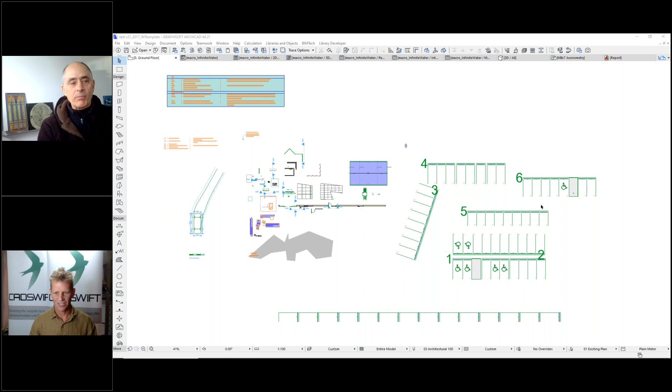So this is the biggest one you see here. This is the new parking matrix tool, where you can basically create your whole parking design with a single tool. So you can see these are numbered. I won't go into this tool too much. Can you just pull something to make a change and show what that's doing? Yeah, you can see there's lots of hotspots. So we can change parking bay types using little nodes here.

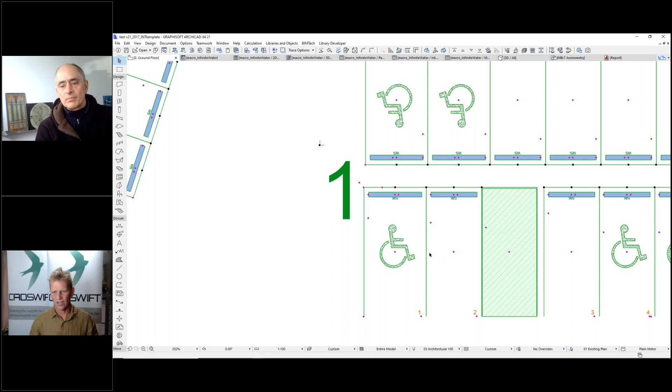So that's the disabled. We've got different types of parking bays, and what you can do is you define within the object the dimensions, the scope of the dimensions of that bay and how it works, and you can create your own bay types. So you can say, I want to create a motorcycle bay, and all motorcycle bays are this size, or I want to create disabled, parents with pram, car wash bays and all that sort of thing. There's also, you can put column spaces in between them, so you can turn on columns and create spaces between bays.

So without going into a full demonstration, can you just pull one of the main ones to get more units on there? Yep, so this is just this one. So you can just drag this out and put as many units as you want. You can also curve them. Let me just see.

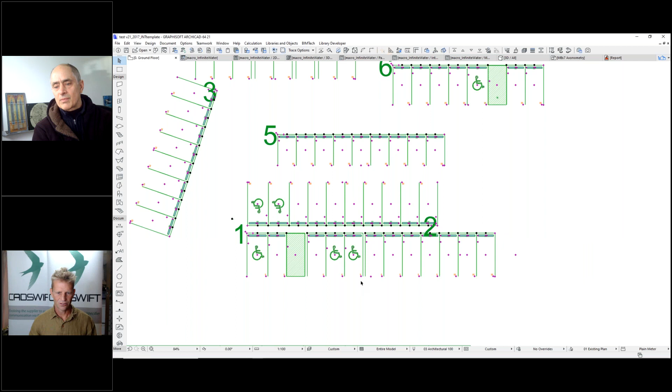Okay, so you can curve the bays. This is a single object, so each element is independent of the others, and they're numbered. You can insert more bays in between, so you can really control the logic of your parking design.

Now, does this show up in 3D as well? Yes, it does. Can you slope it in 3D? Yeah, there's slope, so you can see that one's actually sloping at the moment. You can slope it in both directions and all that sort of thing.

Is this part of a particular library? It's part of the Swift library, and I think it's part of the circulation library as well. So the Swift library is everything. You have a bunch of special purpose library collections, like circulation, which I'm sure has to do with parking as well as some sort of landscape elements.

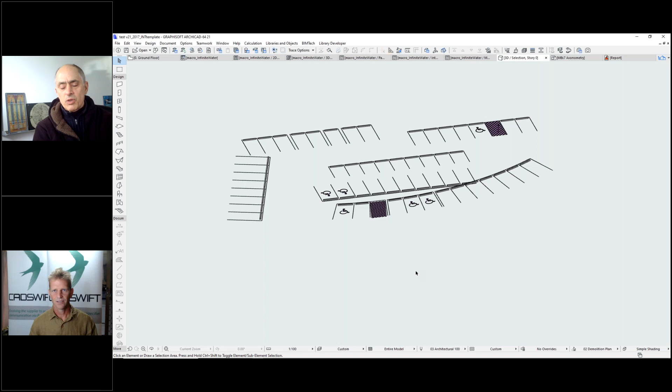Yeah, circulation is parking, there's a ladder object, there's a car ramp in there. There's also, this might be more specific to Australia, but there's turning circle calculations and vehicle sweep paths. So you charge a certain amount for each one of those. You can find information on the website, and then you have the Swift library, which is all of them.

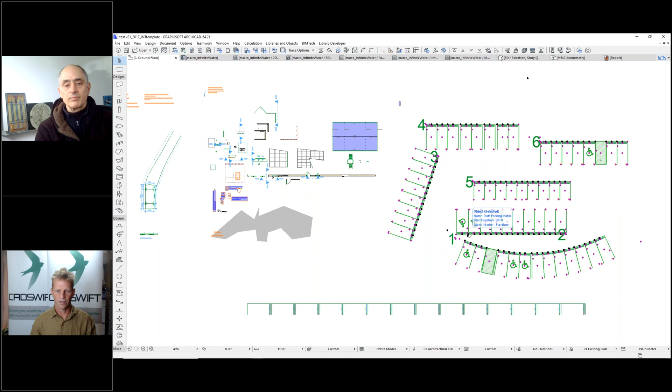Yeah, sure. Using this as a reference, all these elements are schedulable with all the different bits of data. One of the great things about the parking bay element is you can see if you're meeting project requirements, like how many disabled bays or total bays you have. I still have a background managing the CAD or BIM side of projects—I was still called a CAD manager when I stepped out, it wasn't called a BIM manager yet. So I know basically every piece of the process people need to get the most out of an object, and I try to fulfill all those elements.

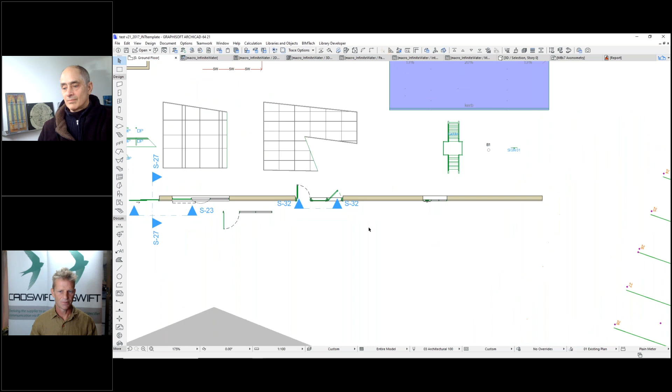So a couple others—that's the ladder tool. It started as a roof access ladder, and it's just morphed into all the different types of ladders. What sort of configuration—we don't want that, we won't worry about that. That ladder tool at the moment is probably in a very strange configuration, but you can have a look on the website at all the different configurations that element can do.

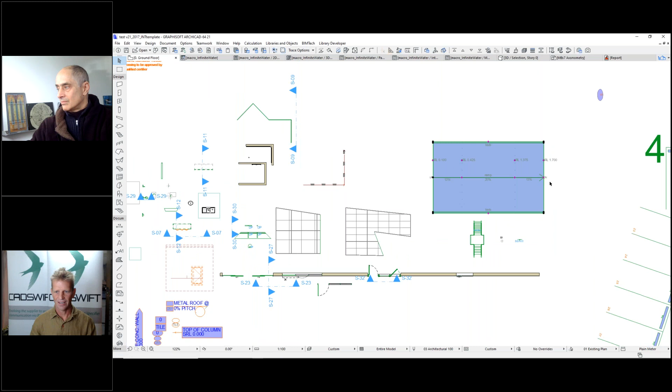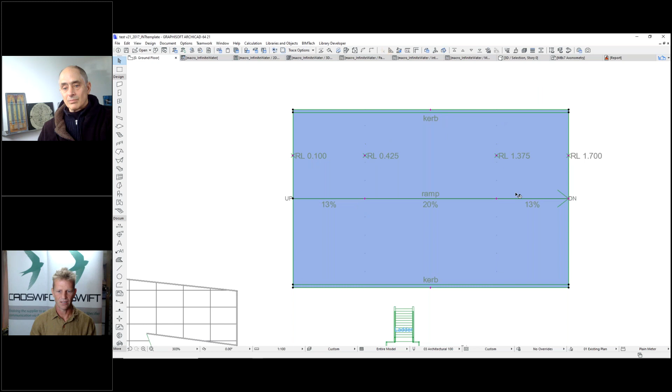This is our car ramp object, which can do all your different sorts of curving ramps. It can do a spiral, it can do just a U-shaped ramp and all that sort of stuff. It automates all your gradients too. All this text is automated and intelligent. Everything's intelligent, there's nothing dumb in this. It's sort of a mathematician's background - I like to do things as smart and automated as possible.

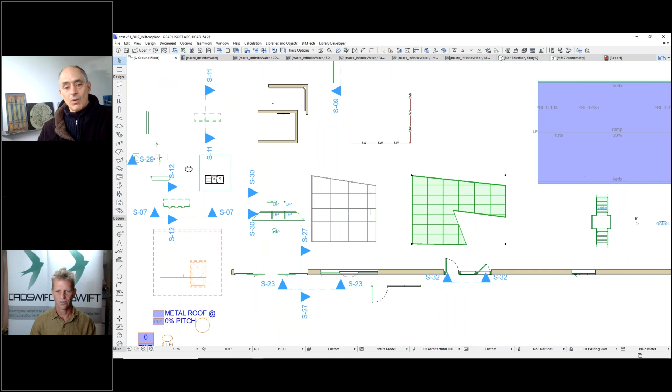These are the ceiling tools. There's two examples here - this is just the standalone, but this is the zone accessory one as well. So you can now place this really complex ceiling element that's got all your different edging and paneling and show it in 3D.

Maybe I need to use some different textures, but you can see the different levels here. So we've got everything, and you can turn off different aspects - you don't have to show all of these elements. But you've got everything from the panel to the edge treatments, your bulkheads, the frames that hold the panels, and the timber frame above that holds that. And I don't have the hangers turned on at the moment in this element, but you even have the little hangers that hang down from the frame element to the panels and all that sort of thing.

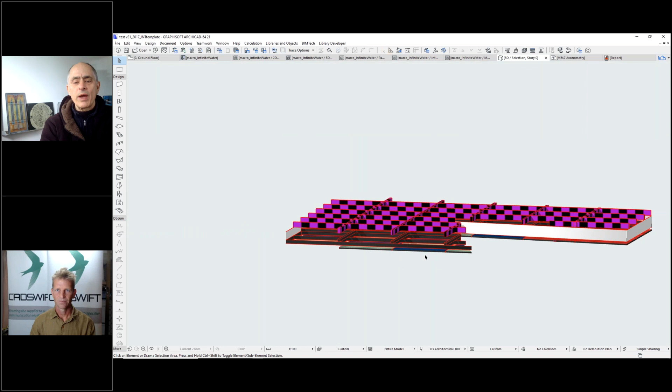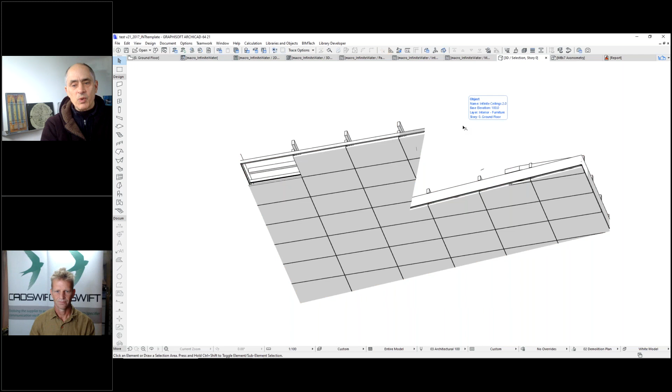So it's quite intelligent. Let's switch to a white view - under the view menu, switch it so we get rid of all those funky colors. View, 3D view options, and then just switch it to the white model near the bottom. Now that's just less distracting for anything where the textures are missing. It's actually just easier to see the geometry. Yeah, that was almost giving me a headache with all those different textures and things.

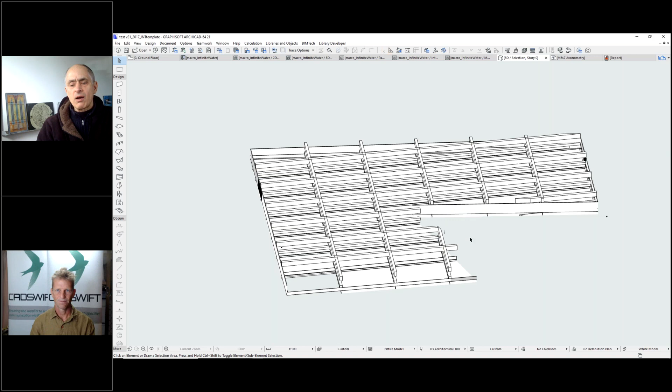So yeah, it's a fairly intelligent and complex tool, and obviously you can turn off individual sections. Let's just open up the dialog so we see the basic way it's approached. Sure. So here you have where you just set the panel arrangement, you know, equals, different joints, spacing, and all that sort of thing. I should probably expand the size of that element.

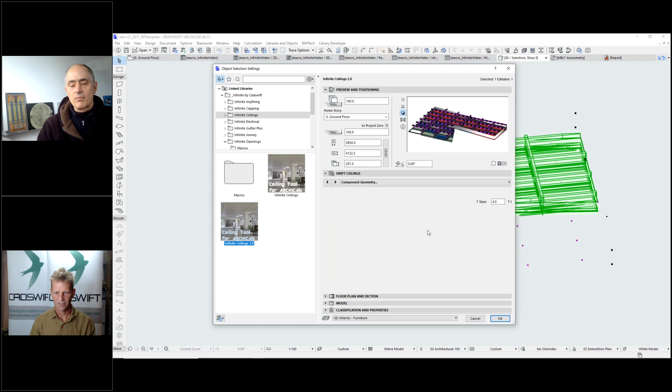And then you basically go through this menu and control each of these different elements independently. So this is just a graphic. You go to your frame settings up here, hanger settings, main channel, spring tee - so you've got different profiles and all that, cornice and bulkhead, and then the panel settings as well, and even the panel gap. And then the boundary is set either manually with those hotspots, which you can have as many polygon elements as you want.

And then you also said it can pick up a zone. So if you actually put zones in a room, it'll pick that up. That's right. So this is, you have the ceiling tool, the original ceiling tool.

This tool - I'm not sure how many of you online were part of this process - but this was something that was actually crowdfunded by ArchiCAD experts around the world. I think it was originally requested by a couple of guys in England, like the Bond Bryan guys, Rob Jackson, and a couple others. And then yeah, everyone got together, and a lot of the people from Sweden as well, and Link Architecture - that's where this image comes from, this is one of their projects. They got together and funded this tool, and so they all use this quite successfully at the moment.

So yeah, the zone thing was like - zone accessory tools are fairly easy to script from a GDL code's perspective, and so after a couple of years working on other tools, I quickly got onto that because placing elements, manipulating elements is the hard part, is the tedious process. So when you can just sort of magic wand a zone and it's there instantaneously, and then you've just got to go into the interface and set up your design, it's really quite fast.

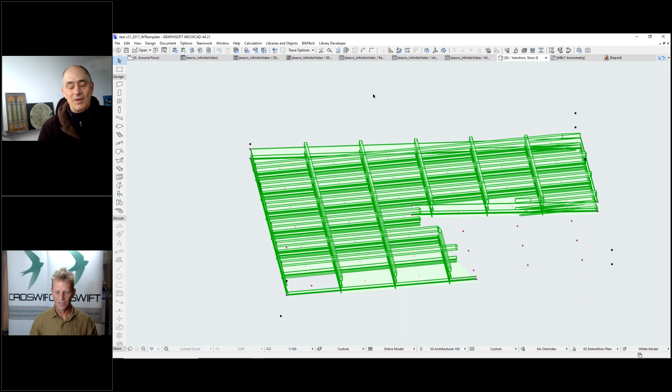The process was arduous and expensive. So I wanted to find a way, and I think it was 2014, I discovered that ArchiCAD objects can actually talk to external XML files. I had to do a project - a plumbing project for a piping company in the UK, Blucher I think that's what they're called - and they sent me this database of thousands of components. I'm like, if I try and do this the normal way, this is going to take me years.

So I started exploring this communication with external databases. They had a very detailed database of all the different sizes of all the different aspects of their components. I thought, if I could create something that could just read this, I can get this project done in a month or so. And I did, and that's how it worked - I was using text files then.

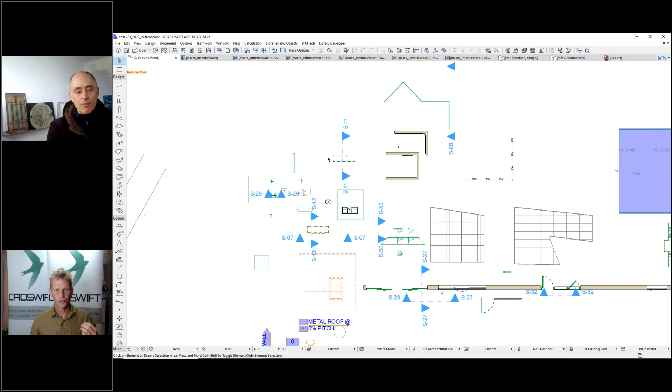I started building generic objects that could assume any geometry, and that geometry would be controlled via this external data. So what that's resulted in - I will go to the plumbing object to show you.

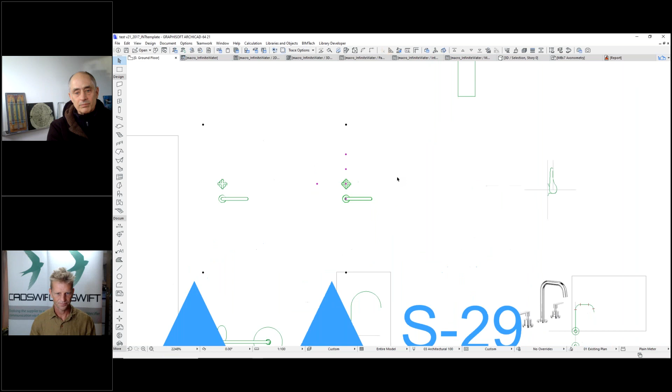Might just, in case I make a mess of things - I might just make a copy of this in case I edit it too far and want to go back to the start.

This is the new interface I'm working on, not quite complete at the moment. I've completed this aspect, which is the spout aspect of the plumbing element. But if we go back to the original - so I'm a back-end developer, not a front-end developer, and it's been made very clear to me over almost a decade that my interfaces are not really intuitive. I build a lot of capabilities in the back end and just open it up to everyone to get access to those parameters, and it can be a little overwhelming.

So I've been trying different interfaces and working on different things. If we go back to the start of this element - this is one of the interfaces I tried before. So what you have here is access to the types.

So you set bench, wall, and so on. And then you set, this is actually the configuration of the tap. Is it single? Do you have two? Is it vertical? Is it a side mixer or a top mixer? And then you get access to a catalog of elements.

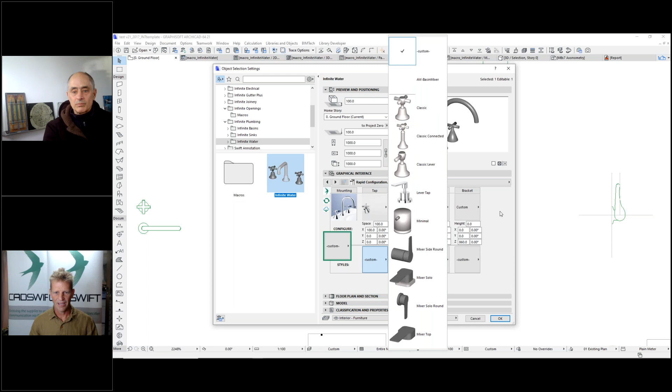Now, the nice thing about this is that you can control this. So if I show you a different view, this is just sort of an easy way to access the catalog quickly. If you go into the next page, this is more where the configurator works, where they can configure it. So here's your taps, positioning, and all that sort of thing.

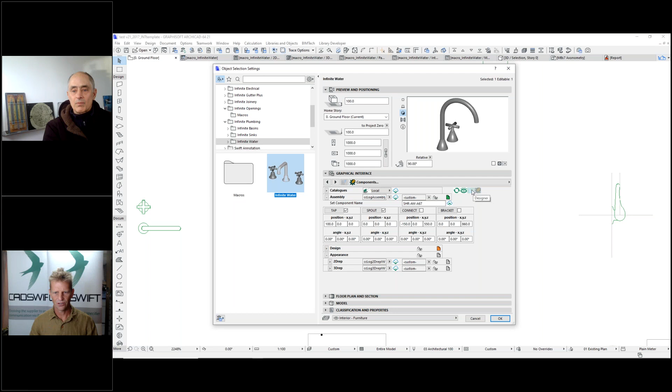of those taps. And then we go to what we called the designer menu, and this is where you get basically just access to the catalogs. So these are catalogs of pre-configured elements within this project. So if I can just jump to this element.

Let me do a refresh to get that data all working properly. I've probably got some things working on, but because I've been messing around with this tool quite a lot. Do you have the catalog option working? Because it looked like you'd be able to choose something from a catalog.

Yeah, this is the catalog. So this is the catalog. This is the built-in catalog that you can actually edit yourself. Select a different catalog, overall thing rather than individual components. So these are the two catalogs we have in here at the moment. They're built in to the tool.

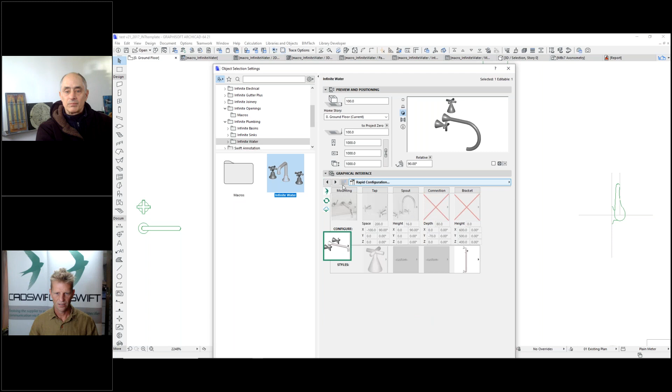But each component also has its own catalog. So this is the tap aspect, and the catalog within there. So there's only a few elements in there. You've got the spout catalog down here. So we have access to, I think what I need to do now is I just need to go back and download the latest catalogs. Let's open this up so we can see.

So we have download. So these are your little download buttons for catalog elements. Okay, so these catalogs are going to, the intention is to have manufacturers contract with you to create versions of their elements that can then be described with different options. Hey, you have it with this tap or that tap, but it's the same family of faucets or something like that. And so there's some programming that goes in to create the model, and then there's programming that goes into do the controls.

So right now you have how many manufacturers in this tap object? We don't have manufacturers. We haven't even contacted manufacturers about this aspect yet. Kind of, we're at this point where it's the chicken before the egg sort of story. We need to have this cloud system built for the whole system to work perfectly.

The only manufacturers we have on board at the moment are for the window and door tool, and we have ASSA ABLOY in there at the moment, and we've got another Australian manufacturer who's just come on board with that as well. And that's an interesting story because that Australian manufacturer is actually an architect firm, an ArchiCAD using firm,

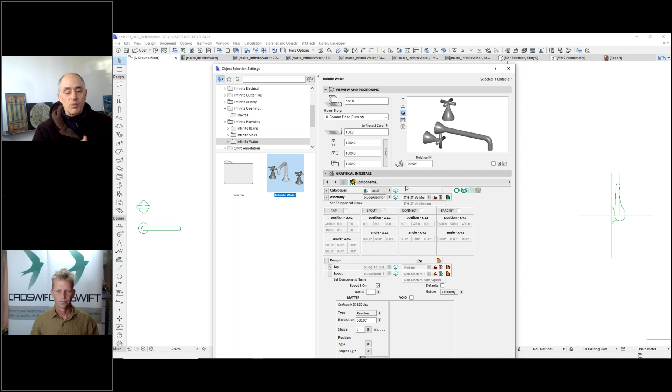So let's talk about the advantages of this approach from the user perspective as well as the manufacturer perspective. From the user perspective, it's clear that there's a lot of flexibility here, and you aren't limited to just, you know, in the standard ArchiCAD library, whatever they have, how many different taps, you know, they have 10, 20, whatever number of taps. You have, well, essentially could be an infinite number. Now, you mentioned the thing of having generic components that are set up as part of an initial design and then ultimately swapping them out for manufacturer specific purchase criteria, right?

So the idea here is that you can create something that the client will go, yeah, that looks pretty good. But as an architect, you're saying, well, we'll find something that's close to that, that looks like that or functions like that. And we'll swap those in and get pricing on that. Or the contractor will specify, hey, let's get this particular supplier. And you want it to be able to swap very easily without having any big issue.

Now, for a small residential context, like you have 2 bathrooms or whatever, no big deal. But when you're doing multi-family, office, hospital, or other larger things, this can be a much bigger question. Or even just in an office doing lots of different projects quickly. So I can see the benefits of doing that.

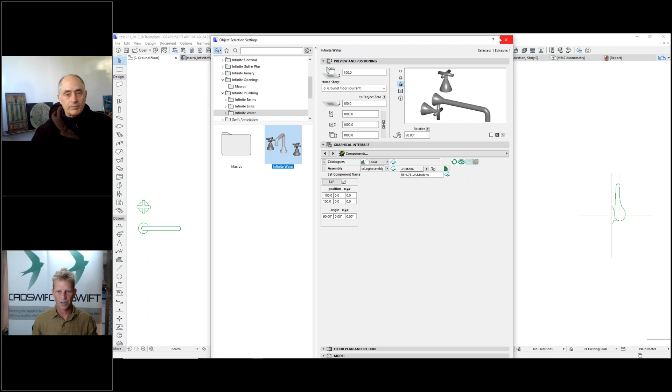Let me just... it seems that in the middle of my coding, I'm not quite finished with something. So some of the arrays are not calculating here. That's because I'm still in the middle of coding this element, manipulating it. So I'm just going to cancel that.

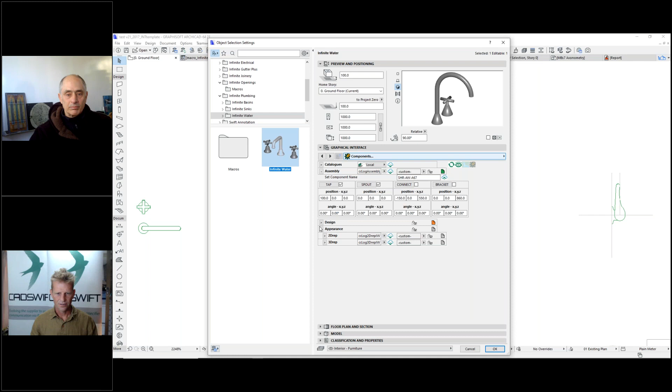I'll go back into it now, and I'll just show you very briefly. Let me turn this function off here. So if we go down to the design, this is the organization. There should be numbers here of how many taps you want to turn on as well. Part of my coding is sort of broken a little bit here, so it's something I can fix very quickly, but I won't do it now, obviously.

So if we have a look at the tap element, I'll go to the page for that so we can see just that. You have 2 aspects. There's 4 separate pieces of tap geometry that you can create. I have to put a limit somewhere. But you can have multiple versions of these pieces.

So basically you're working with base geometry. You're nominating here the matter and the void, so solid geometry and a way to cut that geometry with a void of some sort. I'll turn that void on as well, but it's basically the same sort of thing. So you're nominating whether you're using an extrude, a revolve, or a tube. These are the three main pieces of geometry that people won't have too much problem working with.

We could go into all sorts of different prism types, but you really need to understand GDL to use those things. So can you just show a simple manipulation?

It's one thing to say, hey, you have all these controls, pick one of them, make a change, let's see what it does. Okay, sure. Let's go to... so this is a revolve at the moment for the tap. I think I've got that one worked out.

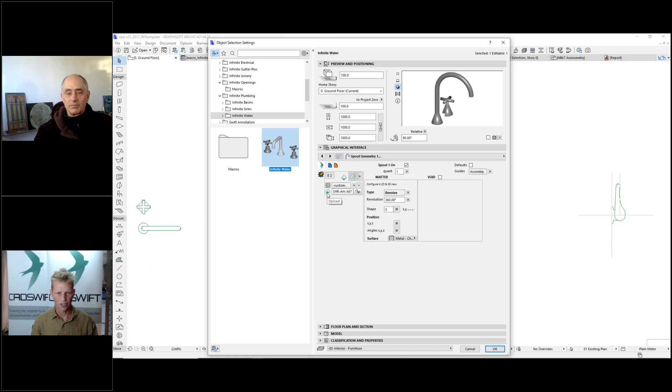Okay, so this is a little quick panel to the catalog as well, different elements from the catalog. We'll pick another element on the catalog just so we can see how it swaps. Okay, let me just make sure I've got the right catalog in here. So this is the download button to update the catalog, and that's an upload button, so you can obviously upload your own modifications to the catalog.

Okay, so if I click the classic basin, you see that's a different profile there, different shape. Let's go down to lever spout, so there's another one there.

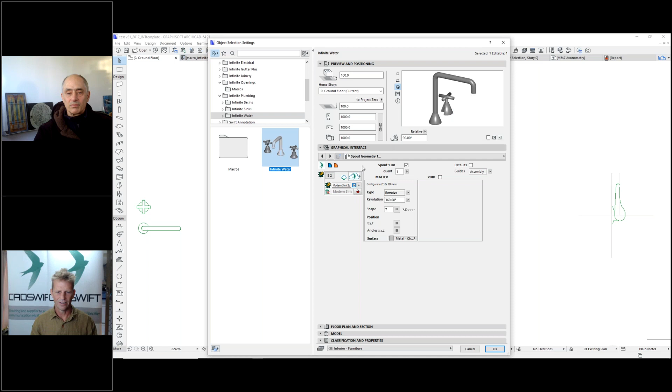Modern sink, and in those other pieces of the interface, you have access to all these through nice graphical images, so you don't have to work on the names here, you can go to the nice graphical images. But if I wanted to modify something like that, I'll do that now. We'll unlock that because let's say this is the base of what we want, but we want to square off this profile, and maybe extend or shrink the tap a little bit.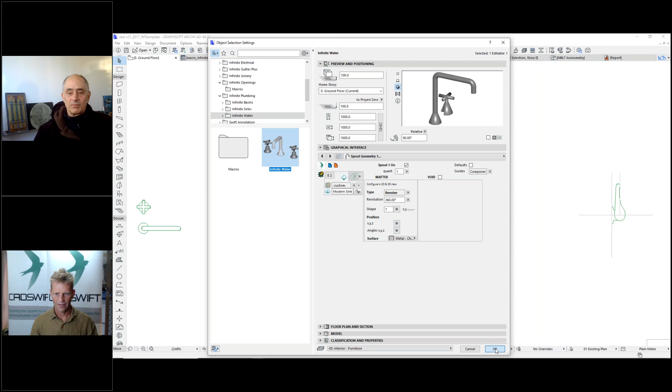If I unlock that, then I change my guides to component guides so I can see them in 2D. There's a little bit of a positioning thing here, I'll just show you how that looks at the moment. Must have the 2D representation, get rid of that 3D projection. Let's go back to the spout.

Click OK. So these are all the little nodes that you use to change the shape. That's the spout path there, and this is the tap next to it. Let's stop for a second - you made one switch I want to explain. You had been showing a top-down view as the symbol, which is convenient. Here now we're showing control points that relate to radiuses and lengths of things, and you're doing it in a 2D view where you can literally pull these things and adjust them.

So this is a setting where you said, let's switch out of realistic mode and go to drafting mode where we're able to manipulate. And if you were to manipulate, can you make that shorter? Just show us how you would make the extension from the tap to the end where the water comes out shorter - can you do that? Yeah, sure.

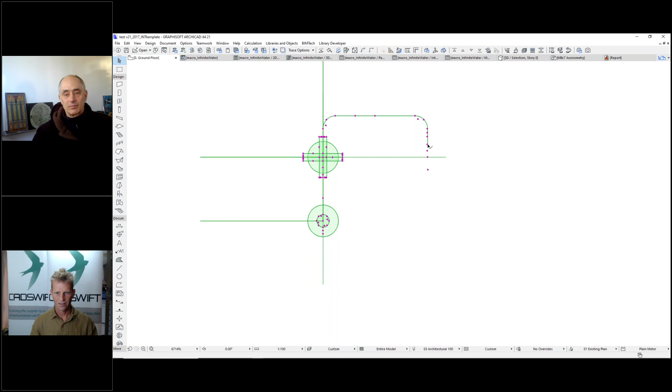So these are the nodes here. Let's say you want to adjust this one and bring that up to there. Now if we have a look at this in 3D, you can see we've now got a much shorter element. That tap's got that void cutting out of it - that's why it's showing up like that.

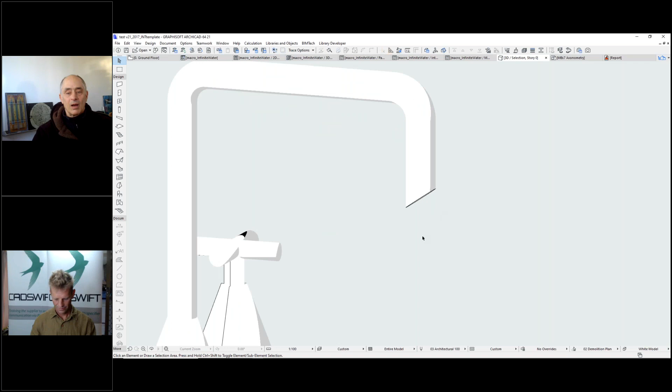And to demonstrate again, if we want it to be longer - longer. We're not going to go past this point because this point controls the final face. I'll show that - let me bring this point out over here and you'll see it gives us an angle on that. So now it's longer and it's got that little angle because that last point of ours is somewhere out here. So you're controlling the direction of that actual final face as well.

So you have numeric controls of things, but you can, in many cases, just go and drag things to visually change them. Very cool.

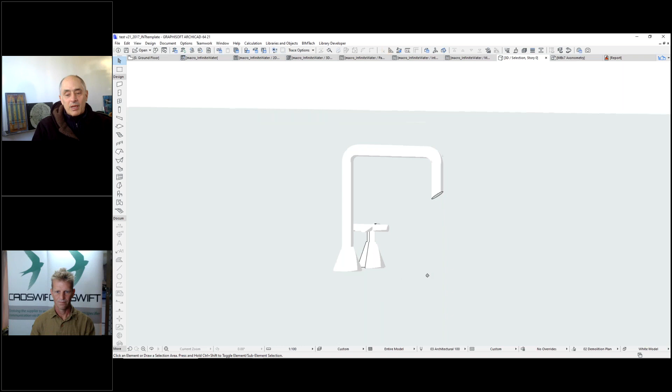All right, so this is obviously a work in progress, and as you mentioned, you're continuing to program it, put in more functionality, and try to simplify the interface, or at least make the interface as usable as possible.

I'm seeing some comments here I wanted to pass along. Craig Vaughn says this is genius, lots of potential. Nicole Kucera has - I don't know if that's maybe Ditto or something like that. And Andy Bunbury asks, who is the Australian company?

That's where I am. So I think this might have been when you were saying this was for - you were doing some work for a company that isn't that large, that bought the timber framing facility. Yeah, unfortunately I'm still confidential in that regard, sorry. They'll be sending something out soon though. We're getting to a stage where we're completing a lot of their content, and they will start sending those elements out. But they're an ArchiCAD firm who are now producing their own windows and doors in their own factory, and coordinating that whole process start to finish.

And this is something that you spoke about, which I didn't get to - the benefits as well for the manufacturer in the process. This is what they're looking at - the data, because it's XML, machine readable, most applications can read XML data. We can actually use the data that controls your content in ArchiCAD, goes straight to the manufacturer, and can be plugged in straight into their APIs as well.

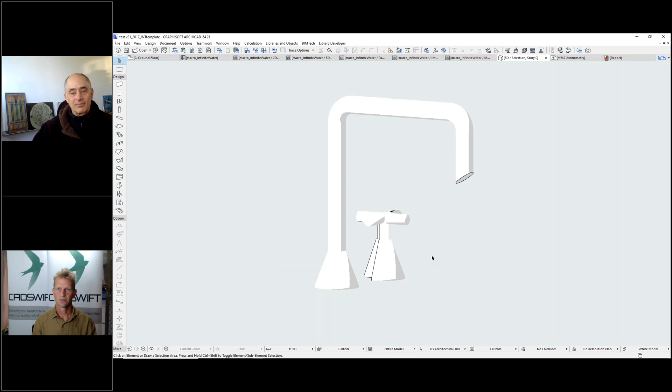I have a question from Steve Nickel saying for us, we don't need specific manufacturers so much as more options available in ArchiCAD — for example, are you doing door hardware too? I know you have your infinite openings tool for doors and windows, which can configure interesting shapes and ganging of different units. I'm assuming you have different hardware for the doors as part of that.

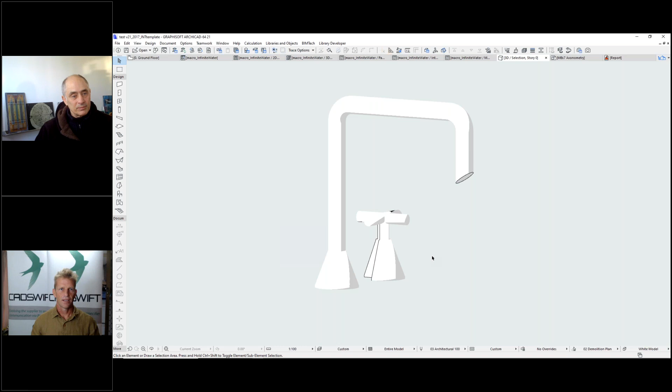That's something we haven't quite completed, the hardware aspect. We do have the tools ready to go; it's just a matter of time pulling that macro in. The fundamentals controlling the geometry of this element are exactly the same as our infinite electrical tool, and the same as the tool that started this whole configuration of elements, which we call infinite anything. I like to be a little humorous with my names — for mathematicians, humor is probably not very funny to other people.

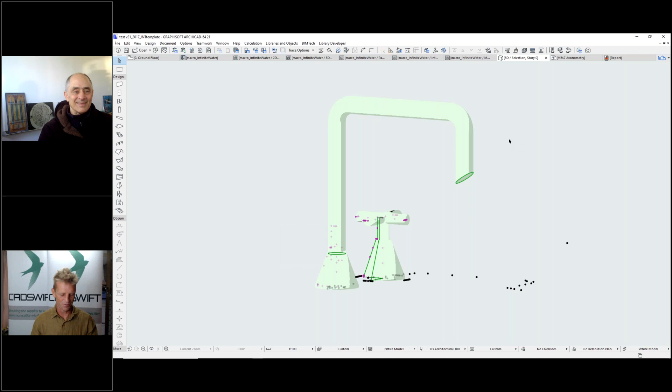But we do have a tool called infinite anything. I just like the combination of the word infinite and anything. This is something I was playing around with - this is a handle here actually, so I'll show you in 3D what I've been playing with. This is infinite anything, and it's just a matter of manipulating all these extrusions and revolves to create the shapes. Obviously, like the plumbing tool you saw, there's multiple pieces of geometry you can add with multiple different shape types, so it's fairly extensive.

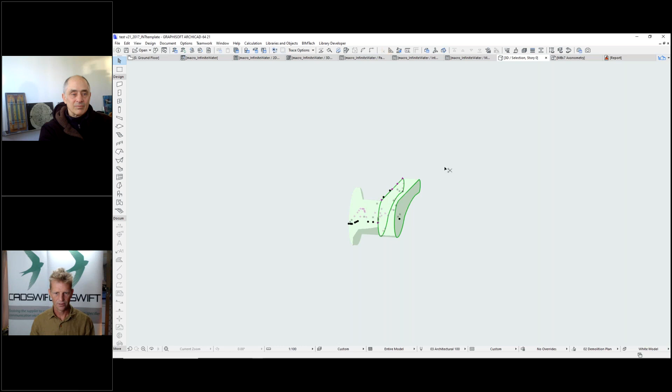The plan is basically to pull this infinite anything macro into infinite openings to control all your geometry there, so you could effectively open up this tool. This was the original one, so this is probably the most primitive looking of them all.

Let's go into our catalog - see, I haven't even saved pretty images for these catalogs yet. Got it on the designer menu. Okay, so these are just elements, element 1 to 8. So you've got 8 different elements, and each element can have multiple pieces of geometry.

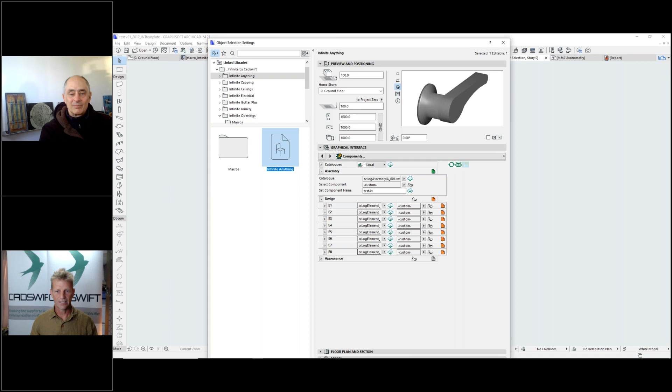You could effectively come into infinite anything, create your hardware, your door hardware, save that to the catalog, then go into infinite openings, open it up, go to the handle, the hardware aspect of infinite openings, and that component you saved here will then exist in infinite openings. So you can apply it to that tool, or it will also exist within infinite joinery, so you could apply it to your cupboards if you're doing joinery hardware as well as glazing hardware.

So for things like door hardware, I can imagine someone, could be you, could go into 20 different door manufacturers from around the world and pick out a few dozen different common variations, create them so that an ArchiCAD user could say, yeah, that looks pretty much like what I want. And then they get that, and of course they can make it a little longer, a little thicker, a little this or that.

Yes. What people do not want, Kristian, is to start from blank and pull a whole bunch of node points to create it, because you could create morphs. If you're going to do that, you might as well just use morphs, right? It's far more efficient to use morphs.

Doing this from scratch - if I was to show you one of the shower elements I did, that is a shower on a rail with the hose element, and then it's got a rain head over the top as well - I think that took me close to 2 hours to configure, and it actually kind of did my head in because I kept getting confused as to where I was. So the intention is not so much that you can manually create anything you want, it's more that it can be anything you want it to be, and we will put in processes to make that as efficient as possible.

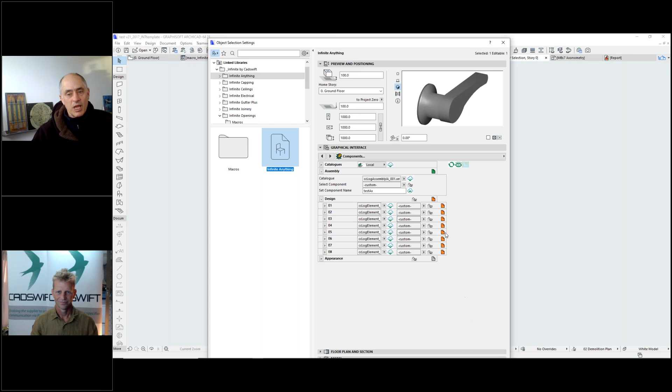When you're a developer, you can specify in some scripting, in GDL scripting, it says, hey, in the interface area of this part, which is separate from where you're creating the geometry, the 3D and 2D geometry, in the interface, which is the dialog box, what does this look like? So here's the interface script.

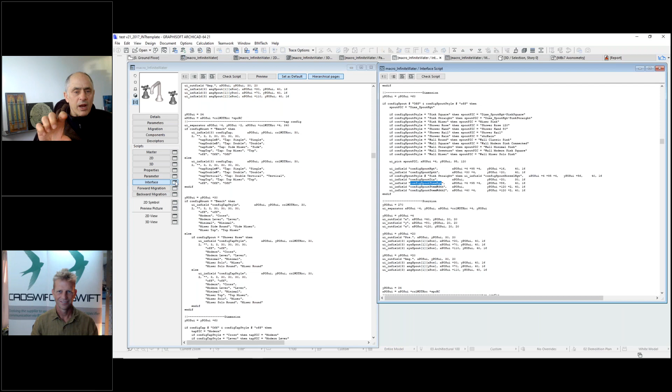Yeah, so this is the interface script. Let me just go into one area and say this is defining a pull down menu or something like that. Okay, let's have a look and try to work this out. This is actually probably a pretty good one. This was the latest, the new interface I'm working on here.

So basically what you have, this is the infield, so this is your parameter. That's the mounting configuration. This is the spout configuration here. So these elements, if I then go to the preview, let's go to our presets. So that's that. When I said the mounting configuration, that's this button here.

So it's a UI infield, a user interface infield, and the user interface infield has several different styles to it. This is UI infield, and I think it's a type 2, which gives us a button, an image, and a piece of text. And then these are standard infields, which is just a very basic element.

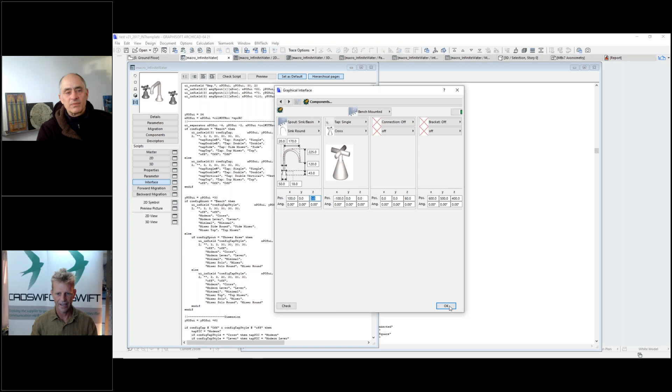So the term you're using is infield? Yeah, infield. I guess there's infield and outfield. Short for input field. So you have your infield, and where's an outfield? I don't use many outfields these days because they're all just text.

I think this is probably going deeper than we need to. Let me just summarize. Basically, in order to get these things looking visual, like Kristian does routinely, there's some scripting that uses built-in options within ArchiCAD's environment that says, in this area of the screen, please add this type of thing. It's a drop-down menu, or an input dialog box where you can type in a number. There are different things, and you're defining the size of it. And if it's pictures, there's a separate place where you say, use this picture, and give it a text name that refers to a picture loaded into your library of interface elements.

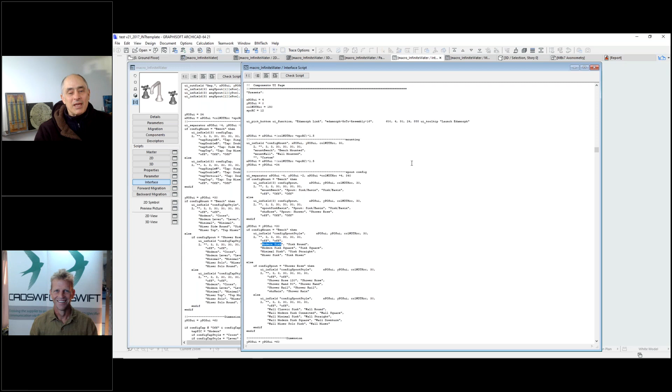So that's how it creates the user interface where you go, oh, I can select this by clicking my mouse. So it's not visual, it's not a visual builder. You script something, look at it, and say, that looks good, or I need to make it taller, or I need to move it around because it's on top of something else, right? That's right, nothing in GDL is a visual builder.

In fact, the biggest complaint about GDL is the manipulation, the interface to manipulating GDL is quite primitive. And I understand that because I know other coding languages that it's a lot more pleasant to work with. But as unpleasant as it may be, as primitive as it may be, it's still extremely powerful.

Yeah, interfaces, you're limited with interfaces a little bit. It's very rectilinear sort of thing. You can't do nice little curvy lines and stuff like that in an interface, unless you save an image of a curvy line. But it gives you all the buttons and functions and links and parameters that you need to operate.

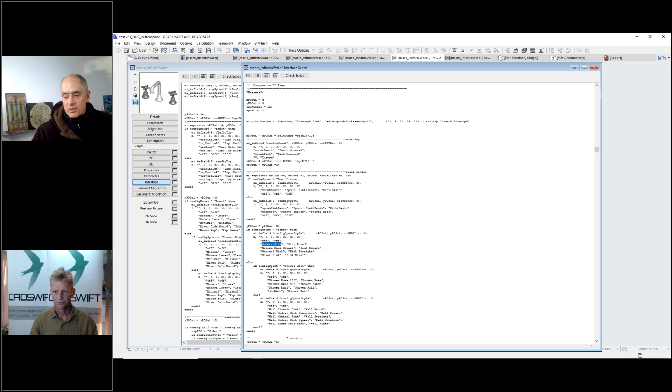So let's go back to some visual things, but Ted says thank you, so we answered his question. Let's see, I'm just looking at comments from Steve. Yes, based on maybe half a dozen manufacturers' products.

I've got this right, so I'm just going to give you the feedback, Kristian, that you're focused certainly on creating a versatile, sophisticated tool in all of these areas that gives a wide range of functionality, that allows communication through both automated things like the XML files, as well as graphical interface where you pull something, select, type in a number, and it does things. So you're creating this amazing resource.

In order to make it usable for ArchiCAD users, or more usable, what you'll need to do is at certain points say, I'm going to stop programming this darn thing. I'm going to create content for it, or get somebody else on your team, or as an outsourced resource, to go and do research on manufacturers and create a bunch of sink taps, create a bunch of doorknobs, create a bunch of this, create a bunch of that.

Now, I'm sure you've done that to some extent, but if you put in more effort on that, then people would go, wow, I got to have that tool because I can choose from 50, 100, or 200 sink taps, and some of them are pretty close to what I want. And so the XML, all that interchange, I mean, that's fantastic.

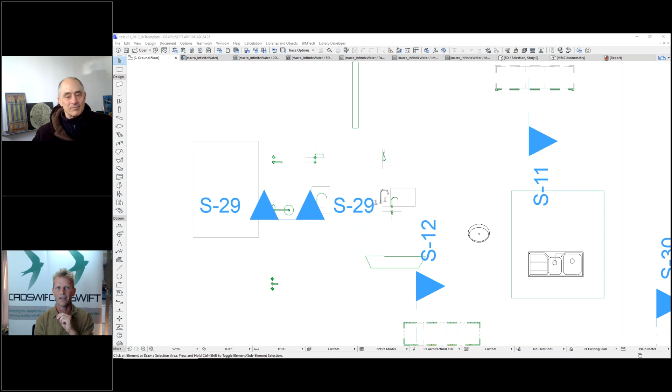It's the mind of a back-end developer, I think people are interested in seeing this sort of stuff, seeing what's about to happen, and understanding the integrity of the back end. These things, we can do anything. We can do any geometry you want, any data that you want, and we can have this happen really quickly. We're working on making it very easy for you to use as well. That's the idea, that we have all our ducks in a row for when we launch the cloud. The interfaces will be polished, intuitive, and the catalogs will be extensive that you can access as well.

Okay, so I have a few questions I want to pass along to you. Peter Wilson says, do these GDL objects require a lot of memory usage when included in a project? No, it's quite amazing actually.

We've actually reached all the limits of GDL's capabilities as far as storing data, memory, and things like that. GDL has a limit of 1,024 parameters. We discovered that because, obviously Graphisoft knows that, the GDL coders at Graphisoft know that, but we discovered it because we reached that limit. The array data for a parameter, multiple values, has a limit of, I think it's 32,627 values. Pretty sure that's the number, and I'm good with numbers, so you can probably quote me on that.

We reached that several years ago, so we worked all that out. I had to contact Graphisoft and say, what's going on? It's crashing now, it stopped working. They said, you've hit the limit. That's a limit that's actually put in place by Graphisoft, not a limit of the software. Well, it is a limit of the software, but it's a limit they've chosen because they thought it'd be ridiculous that people would want to go beyond that for starters. They think I'm a little ridiculous, but they love the work I'm doing, and they've set those limits in to keep everything working smoothly and safely.

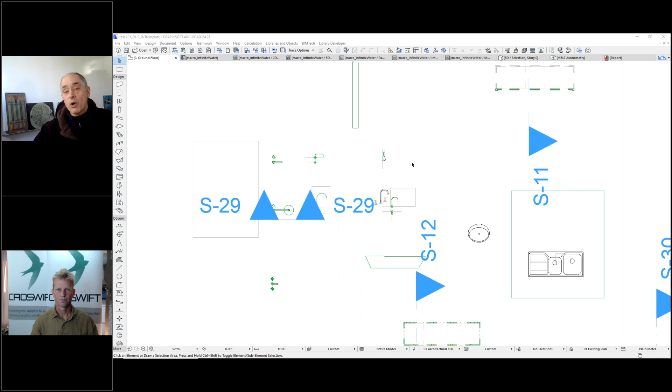So what Kristian is creating shouldn't tax it at all. It should be that only when you go into the dialog will you have all of these controls. The rest of the time, it's already figured out the 2D shape you need to see, which doesn't have to be complex - just enough to diagrammatically represent things, and the 3D geometry similarly. So maybe that was longer than it needed to be, but in practice it shouldn't slow down anything, and there are measures in place as well.

So we want this to have a polished look so you can do a nice render, but we also want it to be efficient in the project. GDL is amazing. If you want to talk simple - I won't go into this because I know I'll probably start to ramble on, I get excited about the more detailed technical side of things - so I'll try and control myself.

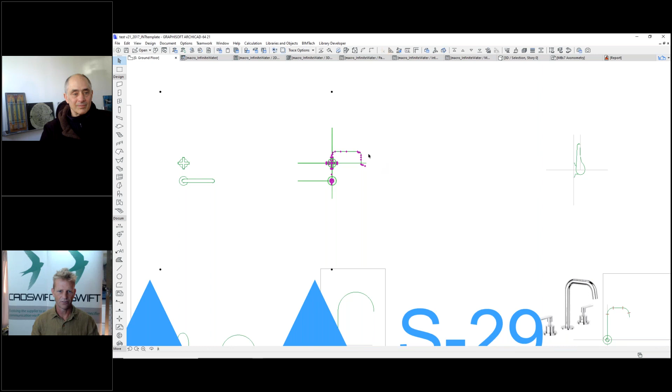But if I create a bath object in Revit, which I don't do anymore - I used to have to do Revit content because everyone kept asking for it, but now I can't stand that piece of software - if I was to create this tap object in Revit, you're going to end up with a file that's somewhere around 600 to 700 megabytes. This library, which can do any tap you want, is around 240 megabytes, and that's big for ArchiCAD - not big as in hard to compute - but if I was to do just a one-off piece, you're talking about a 12 to 15 megabyte file.

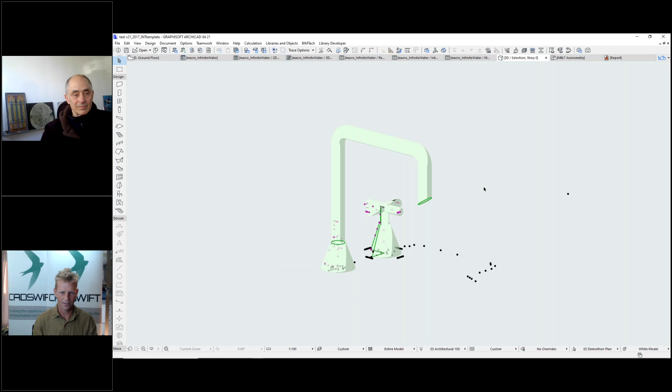The efficiency of GDL is astounding. I really don't know how they've achieved it, but they've done an amazing job.

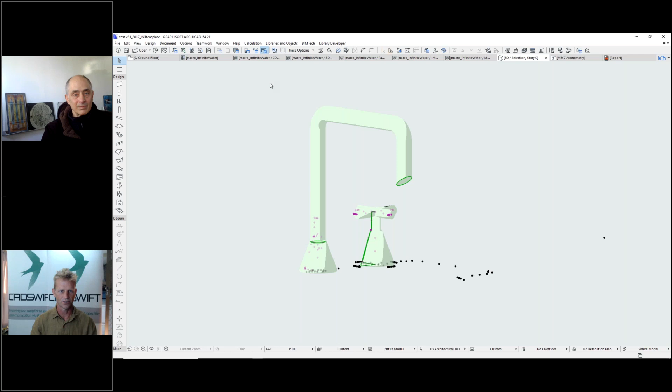On the other side of things, as far as polygon count - you can see this is a really nice, fine profile here, but we can dumb that down for when you do elevation views, and that's tied into the model view options. So you can set up your model view options - I'll just go into this level of detail. What are we looking at here? We're looking at plumbing. You can go into your model view options and control the level of detail of this component, and it's automated because it's model view options.

You can say, okay, in my model view options for my renders, I want a resolution of 360 - that's lines per angle, sort of thing. But when I go down to my elevations, I just want a resolution of 12, or even you could go to 4, because something that is round and needs to be round in a render can be a flat, rectangular element in an elevation. So I'm pretty sure I've got this set up ready - I'll just test that for you.

I always hate doing these live tests when I haven't done them before because you never know. Oh, there we go. So you can see we're changing the geometry of that thing so that when you look at that in elevation, well, these lines are ugly, so you might need to work on that. But when you look at when your elevation does a projection of that element, it's projecting a very minimal amount of geometry. Put it down to 12, or switch it to 12, and it might probably be enough to get... well, sorry, I don't keep getting where I'm at.

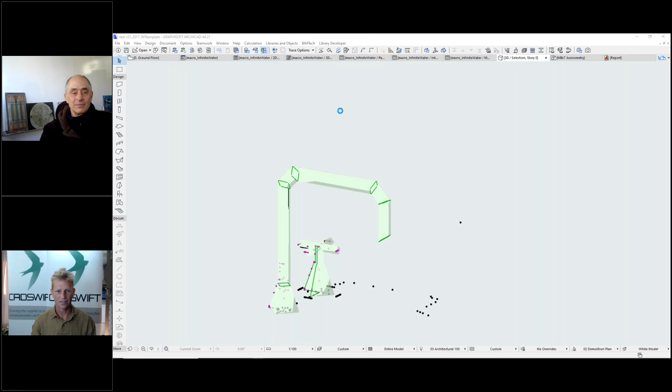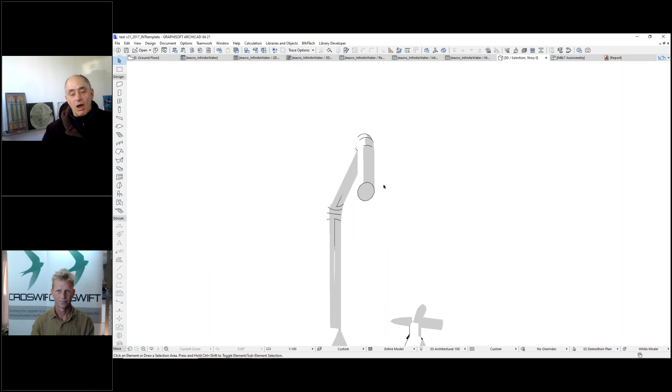12 is actually a standard that we used to use, so when I used to lock these elements... sorry, 12. So this is just an example of how configurable it is. And what Kristian just did was made a change globally that's temporary, obviously, because it's switching on the fly. But this would be, if you had 500 of these taps, they all would adjust. All the plumbing fixtures which are under that rubric would adjust.

So we have some other questions here. Paul Adams says, does your door hardware include door closers, deadbolts, kick plates, push plate, pull levers, etc.?

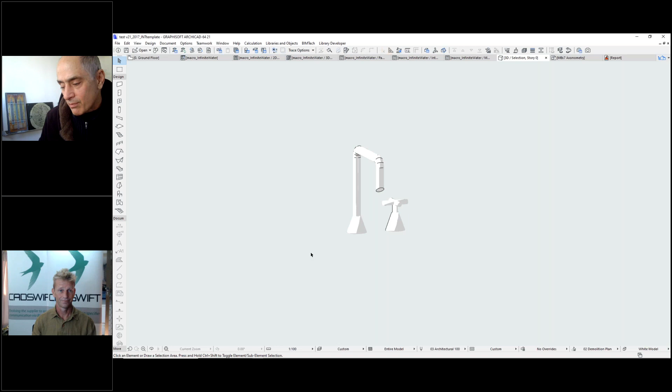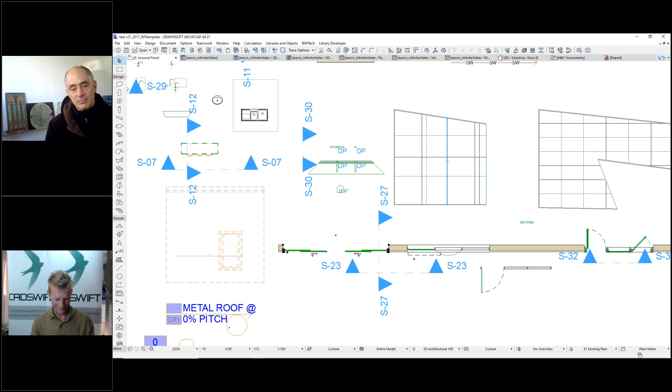Yeah, sure, that's a really good question. Actually, a lot of these elements were done when we started creating the ASSA ABLOY content. So if you go into a door object... I'm messing around with these things so much, they're all a little too complex, but let me take this one because this one looks a little more simple. You can see we've got curved glass and that. So let me just activate that license.

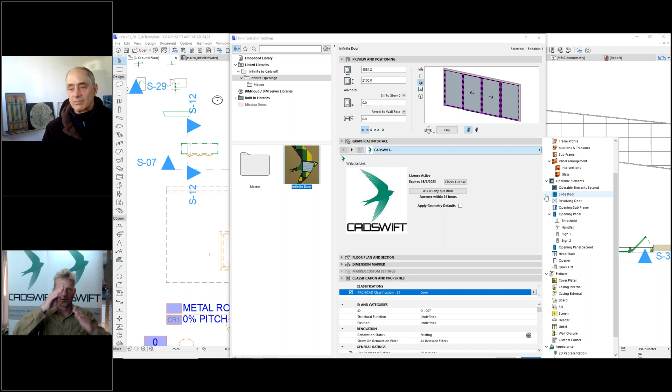I won't go and change that because the 3D doesn't really matter too much. We were looking at the elements. So these are the components of the door. We've got a design, we've got a shape, we've got the frame profile, we've got mullions and transoms - they're also different profiles. We have a subframe, so that's the frame that goes around it. These are the panel arrangement and intersections, which you can turn on and off, so you can do a real crazy sort of geometry within that.

I won't show obviously this whole tool, but you could basically have your mullions and transoms, you can remove sections of them. You can also skew them so they're all off on different angles, and then remove sections. The ones that he was mentioning, like kick plate or door closing... yeah, so if we go into the opening panel.

So in the opening panel, we have panel, handles, kick plates, there's a viewing panel, and there's a grill as well. Let's go to kick plates and see what you have built in. Kick plates are very simple - you've just got an internal and external kick plate. This is all locked down.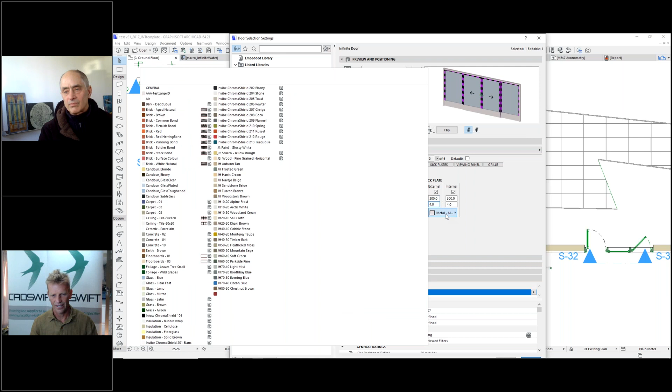Let me just quickly go back here and customize this. Internal and external kick plates, and you nominate the height and the thickness and the material of that element. What about dead bolts? We don't have to show all of this, but since he listed a few things, just going specifically to them - yeah, sure, so dead bolts, we haven't got dead bolts in there at the moment. I mean, that could probably be part of the handle. These are just the generic handle styles that we have at the moment. We haven't bought into the infinite anything in here yet, but maybe that could be controlled in there.

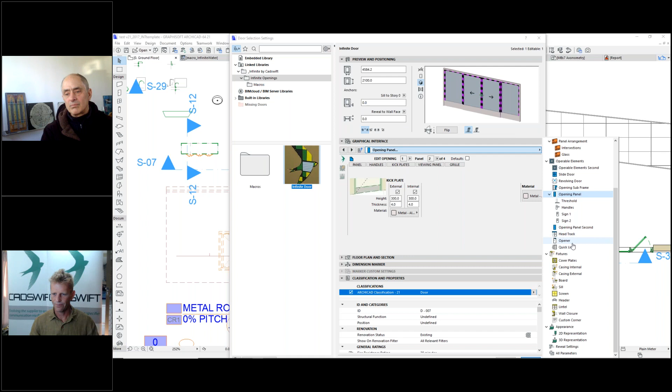We have signage and threshold, viewing panel, grille. I'm just wondering how else you can control dead bolts. We are going to put hinges in there. We do have the one thing that you mentioned was an opener, so we do have openers as well. These are your... must be locked. Yes, let's set that to custom.

Okay, so we do have openers and we have various styles. So that's the positioning of the opener - is it from the wall, external and internal, centered, frame, or is it positioned on the frame, or is it positioned on the panel? And then we've got different types: concealed, single arm, scissor arm, set square, angled, angled external.

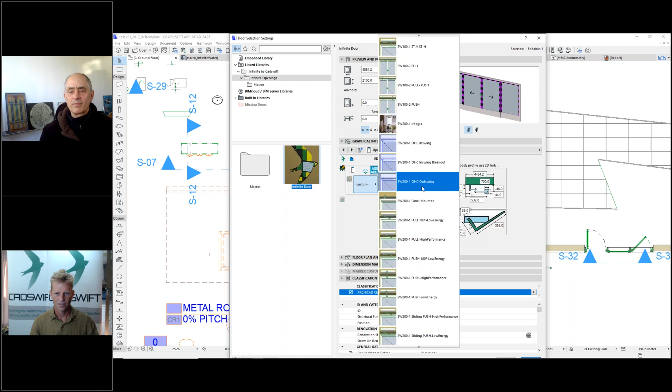And if you go into the ASSA ABLOY content, let's just turn on the ASSA ABLOY catalog. And we have access to all their products - just pick something so we can see it. Okay, let's just turn this one on. Click that, click OK, let's go into the 3D.

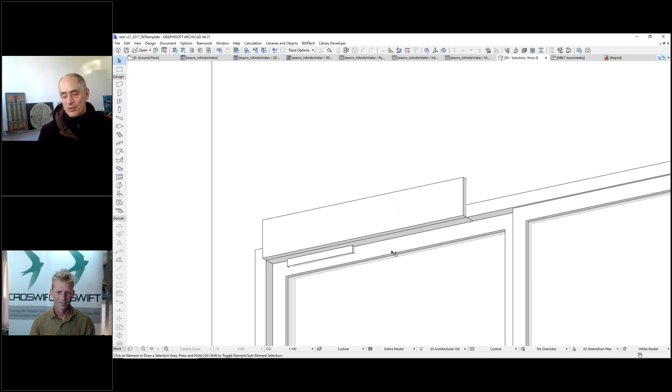I'll probably pick the most simple one that's not going to be very attractive. So that's the opener there. And you picked a four panel door, so it's not logical at all.

How easy would it be to switch that to just a double door instead of a 4 panel? Yeah, sure, let's go to operable elements—it's probably locked too. I think this whole assembly is locked. Oh no, it's not locked. So it gets locked to the catalog. That's one of the good things about the catalog.

Let's just go to a door swing single. Let's change the size, do a double just so we see. Double? Yeah, okay. Door swing double.

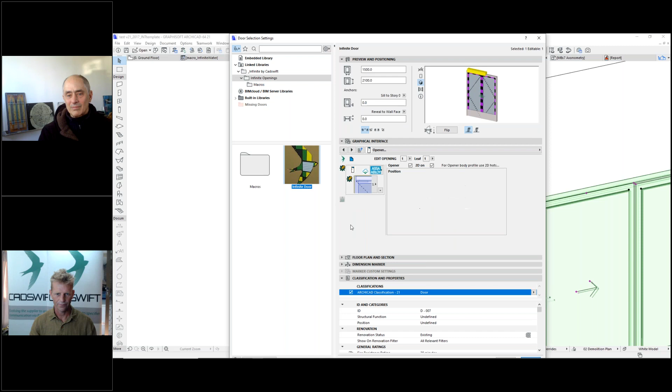And let's go to, where are we? We're going to go to the opener. And we'll choose, again, from the ASSA ABLOY catalog, one of these double configurations here. This is the push element. And we'll click OK.

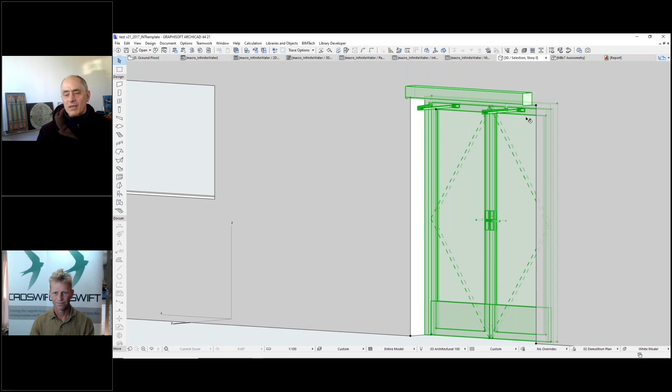It's on the other side—must have been internal or external since I was already in the internal. Okay, so the bottom line is, pretty much all of those things that Paul asked about are in there. You have manufacturer stuff, a limited amount, but also a lot of generic things that are available.

I'm sure the way Kristian approaches things, Paul, if you were to get this, it's part of the infinite openings or part of the full infinite library, which you can get a 6-month free license for. If there's something that isn't there, you can tell Kristian, and I'm sure he'll add it to the work list.

Definitely. Yeah, okay, so Yasik says: great concept and execution, needs more work, but it boggles the mind for its future capability and use across different platforms. Great job. Okay, thank you very much.

Yes, I'm aware of all those. It even boggles my mind a little bit, but yeah, I do know it needs to be presented in a little bit more user-friendly way.

Paul Adams, who was the one who asked about all the door hardware, says: cool, the pieces that are in place have deep choices.

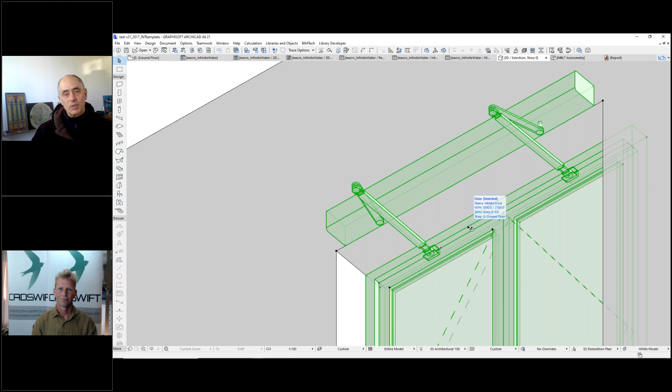Yep, definitely. So now we've gone an hour and 20 minutes. We could go longer, we could look at anything else. Is there anything else either of you in the audience want to say—hey, what does Kristian have for X, maybe he can bring that up. But Kristian, is there anything else you think, oh I forgot to show you such and such because this is really cool? I'd love to see anything else you're excited about.

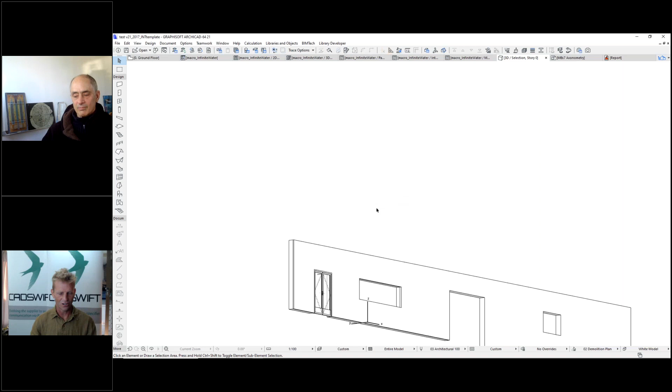Yeah, I don't think so, I think we covered everything—all the important topics that everyone mentions. Look, the capabilities of GDL—I don't want to take too much credit for this. Yes, I've put the time into developing these things, and where you can see it, it gets me excited. So it's not really an effort for me. Yeah, it's time, but I love doing it. Thank Graphisoft for GDL—it's amazing what they've created.

Sure, it'd be nice if it was easier to work with. But I think one little thing would be to say: look, even though these tools are sort of complex to work with, there are things you can do. Once you get used to them, they're not so complex. You look at them and you've never seen them before, and you're like, whoa, this is just wild—yeah, it's really cool what it does, but I don't even want to touch it because it's just so over the top, too complex. And I get that.

There's basically a 2-week process, depending on how much time you spend with the tool, where you're going to hate it for 2 weeks, and then after 2 weeks you're not going to be able to live without it. That's basically the feedback I get from everyone. Large companies struggle to implement these tools because no one wants to touch it. I get that, because I'm the sort of guy that once I find a breakfast I like, I don't do any other breakfast for months and months because I've got my process. It's just efficient, it serves me, I don't want to change it—don't start bringing in other ingredients because I've got my thing.

Larry Park asks, do you update existing users or current users for your libraries as you're doing development work? Yes, and at times, once again, you can tell I'm back end excited about the back end. I used to do that a little too often, and it used to annoy people. I'd make a change, go, oh I've done this, send it out to everyone, check it out, and everyone's like, I don't have time to update all my libraries again.

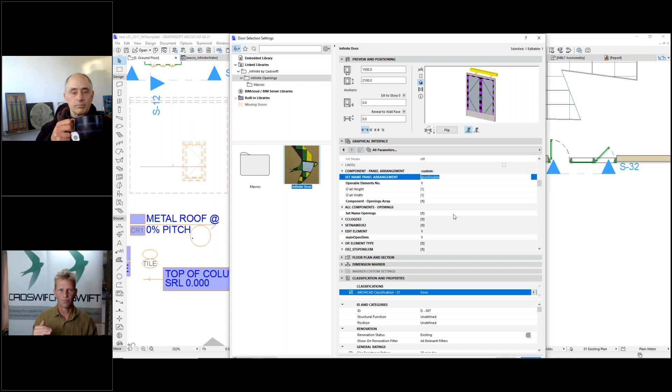Yeah, definitely. So the end goal of this library is that it's all free. That's what we're aiming for. But obviously, to do all this work, I need some sort of revenue. We are on a subscription model at the moment - that's the way all software is. We're actually trying to set up the system within the cloud so it can be a monthly subscription, so you can turn it on and off for a project. The beauty of these tools is even when the subscription has expired, the tool remains in the project in its last manipulated form - it's not going to disappear even though you don't have a subscription. So what that means is you can basically turn it on project by project. That's something we are looking at. Financially, that might not be the best idea for us because it doesn't lock people into the 12-month subscription, but that's the way everything goes - Microsoft Office, Netflix, whatever else it is you're using - that's the standard, and I think we will conform to that as well.

However, this is the business side of things - it's the chicken before the egg thing. We need these tools to be funded, and the funding from the manufacturers is a fair bit more extensive, even though it's extremely cheap compared to traditional manufacturers' content, because we can create it so efficiently. I can finish a manufacturer's project using this content in 10% of the time that I can doing it the standard way. So that saving goes on to the manufacturer - the manufacturer saves a lot. They obviously also get a lot more because they get this communication, instantaneous, early in the project - so we're saving everyone money. And then once there's enough revenue coming from the manufacturers, then we don't need the revenue from the user.

And the fact is, right now your white library, which is all of the stuff that you have created, is roughly $1,000 - is that right? US or Australian? It's Australian - it's 1,080, because as a mathematician I have a particular thing about numbers. It's got to be a multiple of 16 - it's a universal number, black hole equations sort of thing, chaos theory stuff.

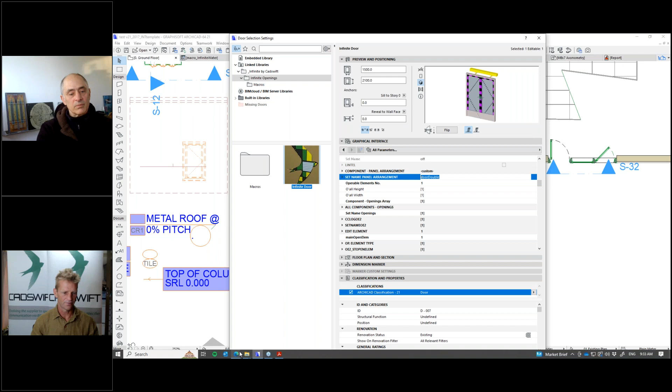I can actually very quickly show you that, because we had the website crash. You can only manipulate with an active license. So if we go into where's the white library - so you can see this is the discounting price as you go.

If you've got over 200 licenses, you're only paying $104 per license. One license is going to cost you 1080 a year. 2 licenses will cost you roughly 1,400. 3 licenses would be about 1,460 - it becomes really minute increments as you add another license. So actually 5 licenses is about 1,500, compared to 1 license for 1,080, and that's Australian dollars.

So obviously for Americans it is significantly less. So this is where you're at now, and down the line your aim is to have manufacturers fund this, and then it potentially can be just a very nominal amount to maintain a user membership.

It's not a huge amount we need to reach with the number of tools we need to reach. The funding for each tool - we don't need extensive amounts of money to continue to develop these tools.

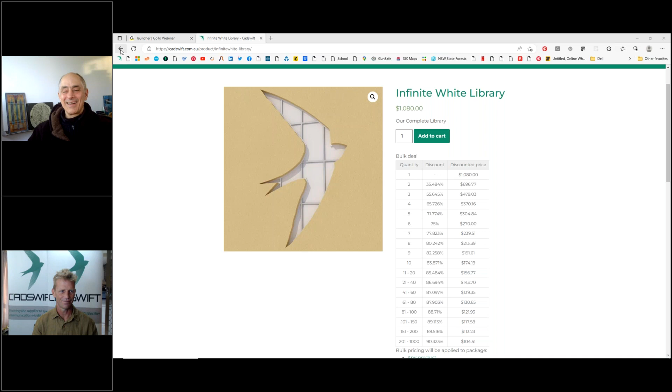Infinite Water is that tap tool. I don't like the term tap or spout. So Infinite Water is the tap tool. And then the plumbing has more stuff than just the taps, I guess. Yeah, so it's the taps and it's basins and sinks as well. Okay, and they've got that same catalog functionality, flexible geometry, easy to manipulate yourself. The sink tool is really cool with the way you can create any manufacturer's component with that tool.